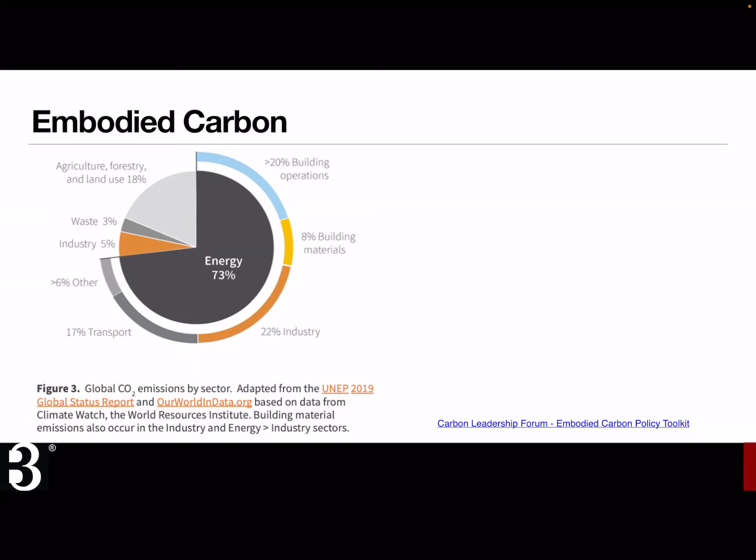So where does embodied carbon come from, and what are the phases that lead up towards understanding the key life cycle stages of a building? They come at the product stage, from the raw materials that are extracted, and then the manufacturing processes that occur. This could be blast furnaces used in making steel, things like that. Then there's transport, and transport actually can happen all through these phases, so that's something to keep in mind.

Then there are the activities involved in constructing whatever it is we're making, and the embodied carbon used there. Then we get into the use phase of a building, which has both operational carbon—the energy used to heat and cool, and for people to charge their phones and do things like that—but we also have maintenance and repair of things within buildings during their use phase, and that's additional embodied carbon.

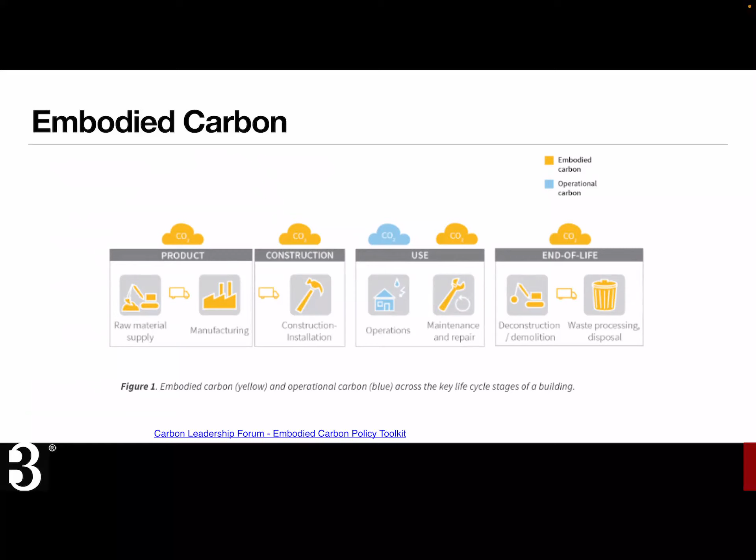And then at the end of life, we have the deconstruction, demolition, and whatever waste and embodied carbon numbers there are from that.

Then we get to certain renovation and maintenance phases, where there'll be other smaller spikes of embodied carbon that come and go, continuing into the future. So it's important to think about how all those pieces fit together, and we have different tools to address these different sources of emissions in our buildings.

So for embodied carbon, two tools that I'll talk about are whole building LCAs, and what's starting to become known as buy clean initiatives, or another way to talk about that are environmental product declarations, which are a review of the embodied carbon in the supply chain of a product. So those are two tools to use to get at embodied carbon reductions.

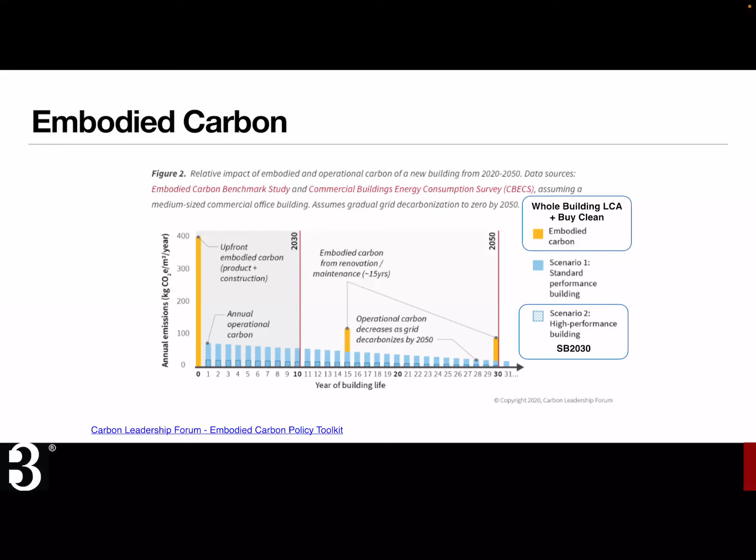But both things are important, and understanding how they fit together is important to consider. The other thing that's important is, in the phases of a design project, you need to use different tools at different phases. During pre-design, when you're conceiving of a project and what systems you're going to use—are you going to have a concrete structure, a steel structure, or a wood structure—that's when a lot of the system level decisions are being made, and there's a high ability to influence life cycle emissions. Then in the later stages, design, construction, and use phases, other tools are more important or more useful.

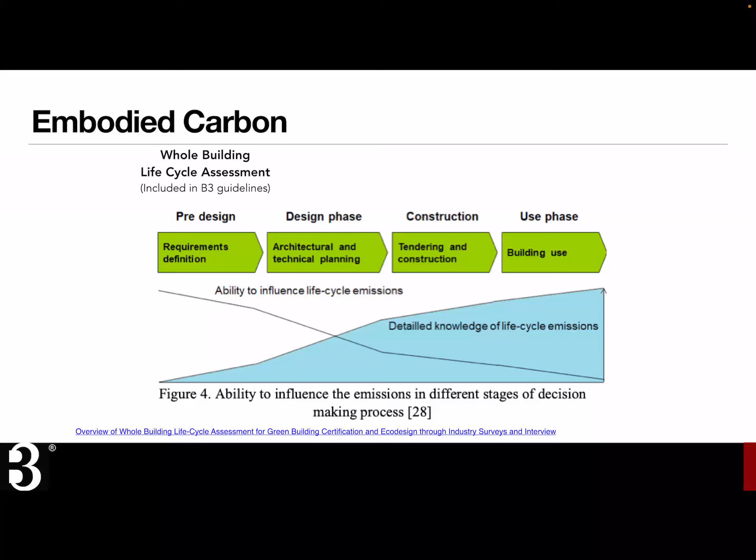So in the pre-design and early design phases, whole building life cycle assessments are a great tool to do some system level comparisons and make those choices. And then once those are made, during construction, that's when a procurement policy—some places known as buy clean, using environmental product declarations—that's when you start to use that tool.

You've decided to do a steel structure, and you want to know the steel that you're using is lower embodied carbon steel than some other steel options you might be considering. And that's how those two tools fit together.

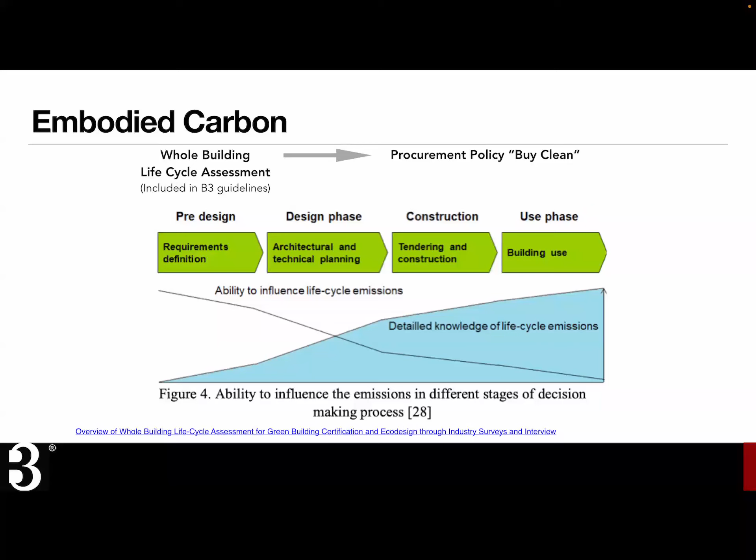We have authored a number of reports now, looking at how we put all these together for construction work here in Minnesota, in terms of how to have a comprehensive strategy for using whole building LCAs and environmental product declarations, something we've done a couple of times.

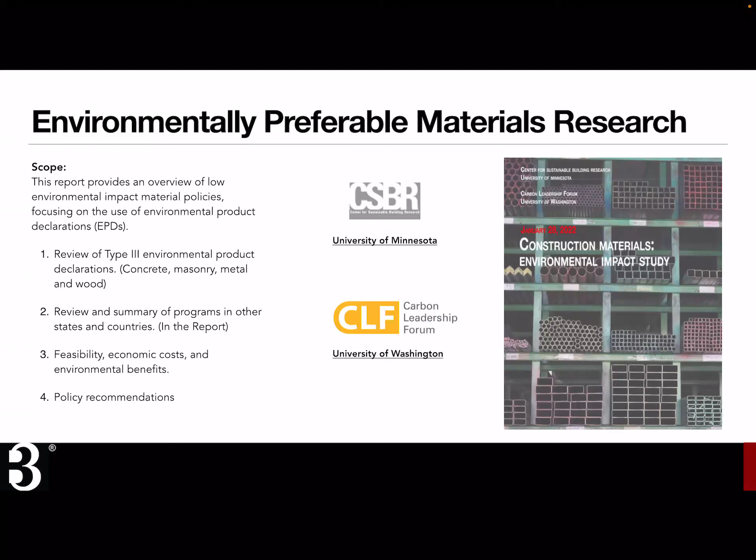It's also important to look at the hierarchy of decisions that you need to go through as you're making these decisions. The first is, should you build a new project, or is there an ability to do a renovation? The most important decision in the hierarchy is whether there's a possibility to do building reuse for a project. Once that decision's made, that's when a whole building design or whole building LCA can be used to optimize some of your decisions, things like structural choices.

Then, from there, you can make some decisions using whole building LCAs. You can even do some sort of assembly level optimization. From there, you then look at material substitutions that you can use environmental product declarations for, and that is how you can make all these decisions fit together.

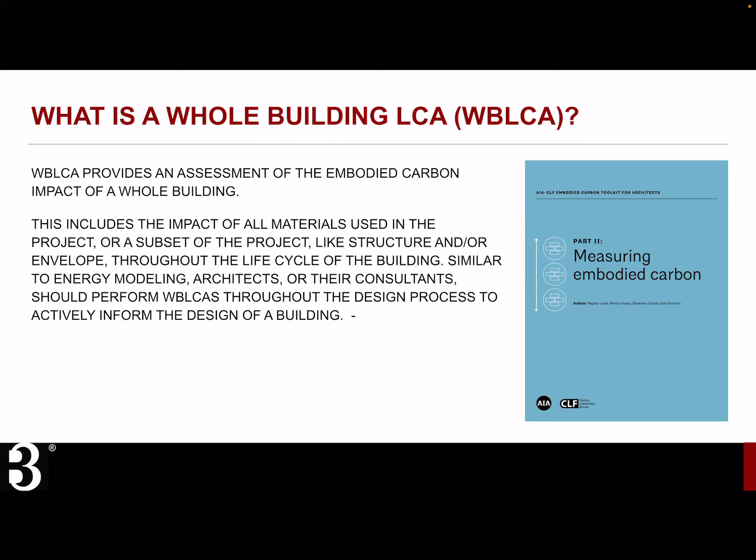The American Institute of Architects has published a series of handbooks and toolkits on how to use whole building LCAs and how you can use them during a design process. So I'd encourage everybody to look at some of those resources.

And within that, they really define which operational or which life cycle stages are considered when you're going through a whole building life cycle assessment. So typically they are kind of cradle to grave assessments to make these reviews and system level decisions.

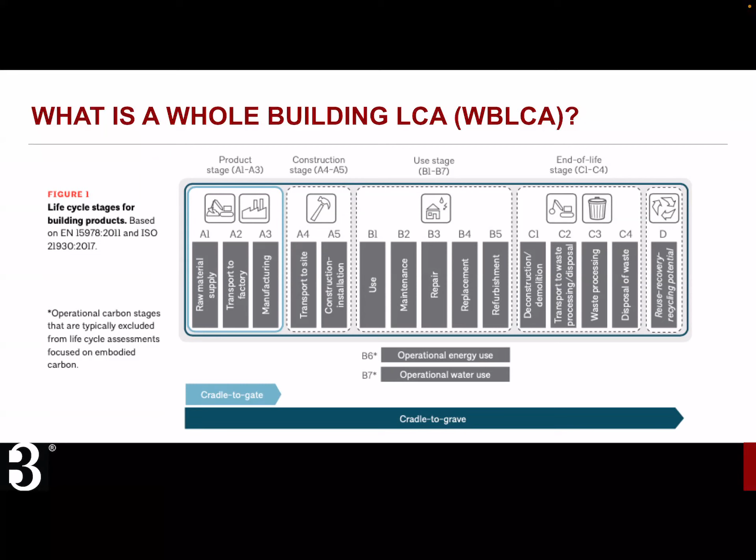That's important, and that's actually something you have to control for when you're doing some of this modeling, to make sure whether it's a whole building LCA or an environmental product declaration, you have the same life cycle stages assumed as you're doing a comparison of one system versus another in a whole building LCA, or one product versus another in an environmental product declaration.

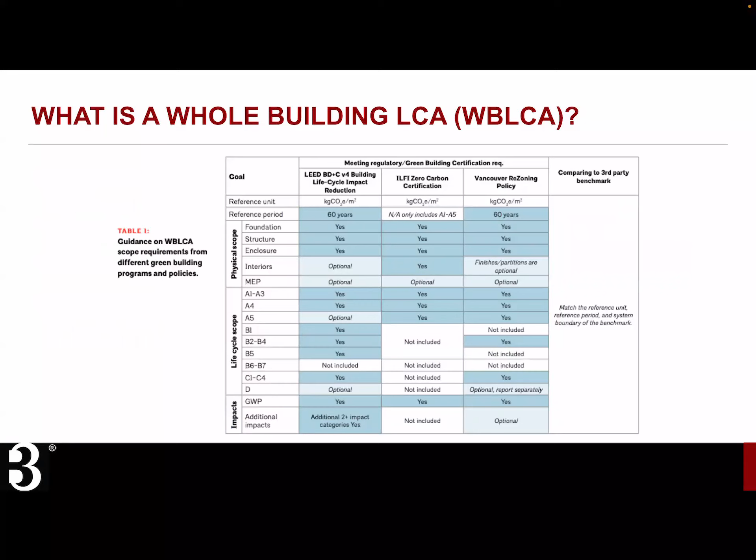There's a series of, and I won't go through all this detail, but this slide shows a number of the physical and life cycle scope controls that are put in across different systems when you're doing whole building LCAs. So that's important to keep in mind. That's still sort of a work in progress.

Some of the big recommendations that came out of the AIA toolkits are to use whole building LCAs to look at the possible savings from building reuse, to identify hotspots of projects for particular materials early in the design process, to estimate the whole building carbon footprint of a project, and to compare different scenarios. One design scenario versus another might have a different carbon footprint, both at the building design level, but also down to the system level. Those are all things to use whole building LCAs for.

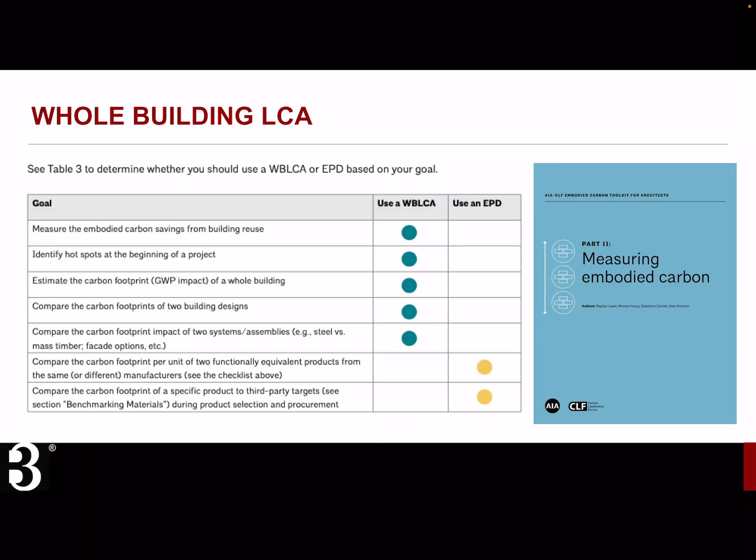Environmental product declarations are better used to look at comparing the carbon footprint per unit of two functionally equivalent products. In other words, compare one steel section that you're using in your structure versus another steel section. That's how you can use environmental product declarations. You have to have functionally equivalent units with equivalent product category rules. So it's great for steel section versus steel section, not as good to compare steel versus concrete or something like that. The whole building LCA tools are better for those sorts of things.

I'll skip through some of these things. There's also a number of discussions or reviews looking at benchmarking the values that we get out of some of these tools. Here's some examples from the Carbon Leadership Forum and some other initiatives that are important to consider as you're looking at what's the level of data that you get from some of these systems.

One challenge with LCAs is that they're very good for relative comparisons of one material versus another, and that's what they're good at.

They're not like a nutrition label, so you can't get absolute accuracy of data in these systems, where you can feel like you have a nutrition label with embodied carbon data. So good for relative comparisons, not so good for absolute data, and that's just a reflection of the LCA data sets. Maybe there'll be some questions about that we can discuss at the end.

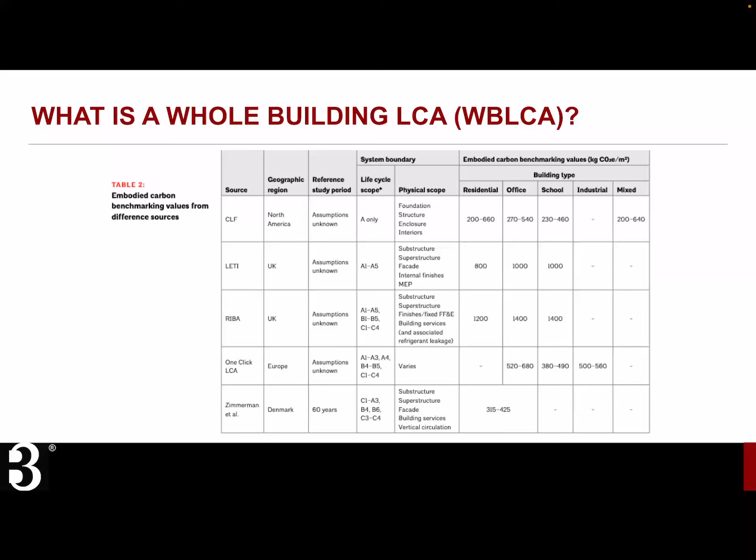So just click through some of these things.

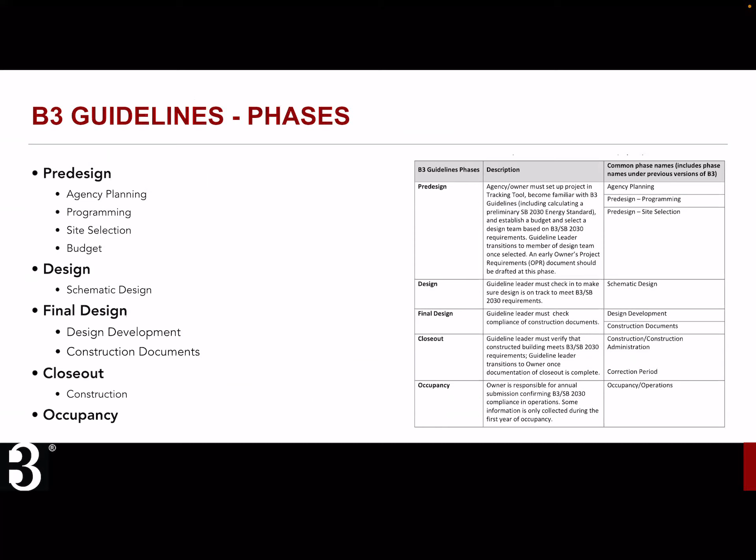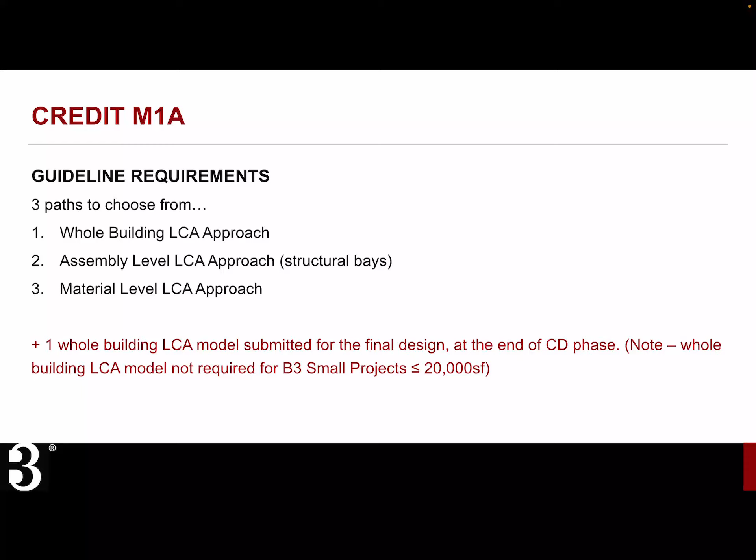Here are some examples of how we've integrated embodied carbon within the design phases of our Minnesota Sustainable Building Guidelines. We asked teams during final design to put together a whole building LCA. We're also working on how we'll use EPDs during the construction phase. Right now, we have 3 paths teams can take: whole building LCA, assembly level, or material level LCA approach.

We basically collected data for a long time. Now what we're having them do is show that they can make a baseline building with their whole building LCA and target a 10 or 20% reduction in embodied carbon emissions, as our current set of guidelines, done at the whole building, assembly, or product level.

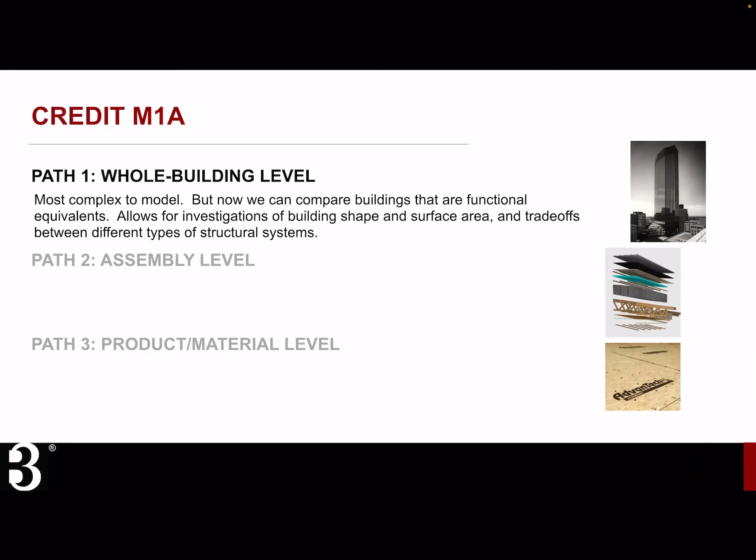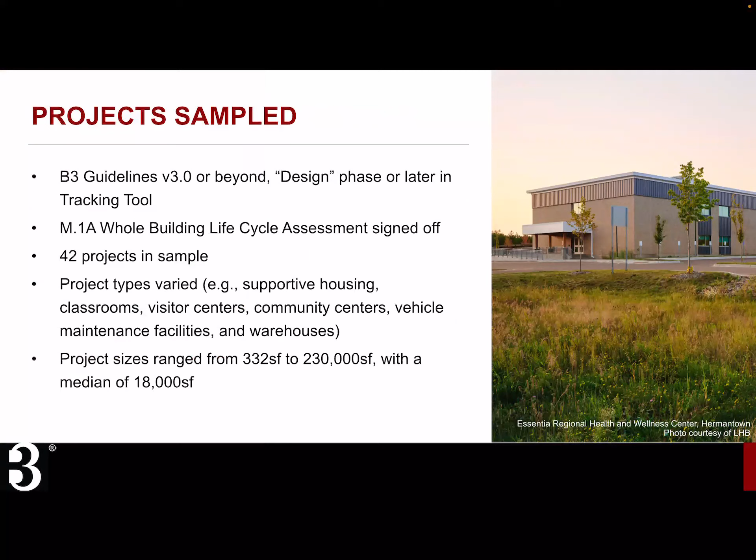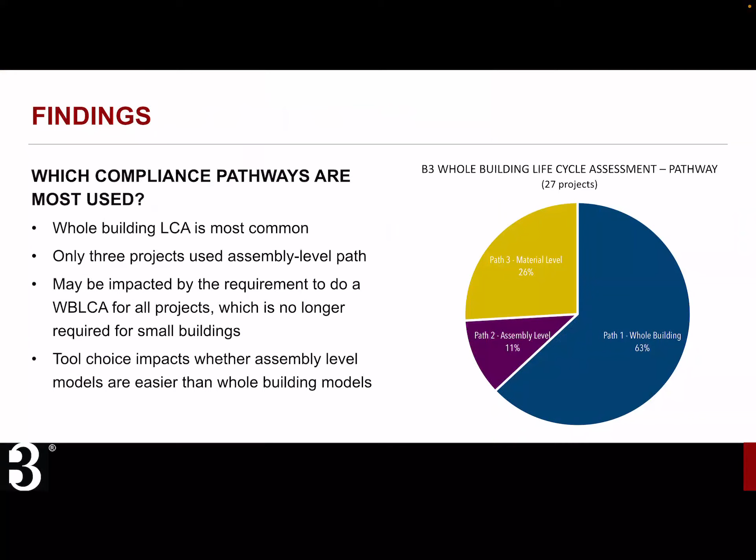We're working on some of the next phases of these guidelines. We've tracked for almost 20 years now whole building LCAs on a number of projects. This was a review looking at a sampling of those projects where we had 42 projects with whole building LCAs, with a range of project sizes. Most of our projects are doing whole building LCAs, some are doing material level, and fewer still are doing assembly level whole building LCAs.

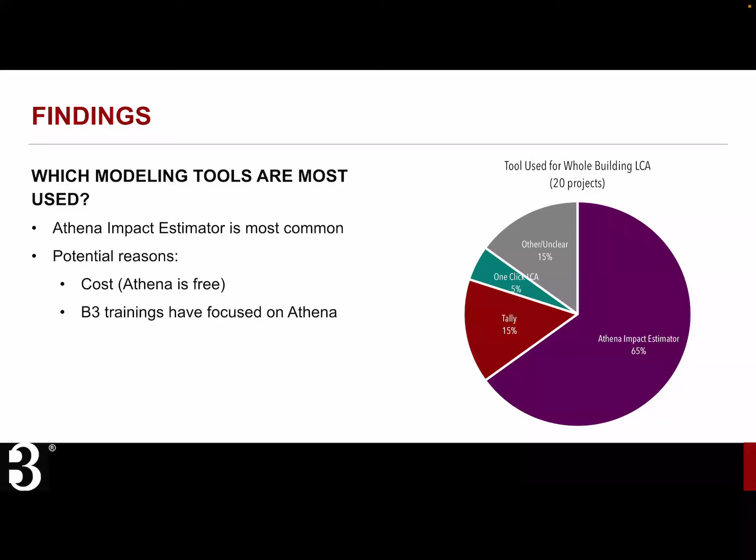The tools projects are using - most of our projects have a long history of using the Athena Impact Estimator as our whole building LCA tool. It's also free, so that's the tool most teams are still using. However, we've opened it up so teams can also use Tally, which is integrated with Revit, and we're starting to see more teams use that. One-click LCA is another tool some teams are starting to use.

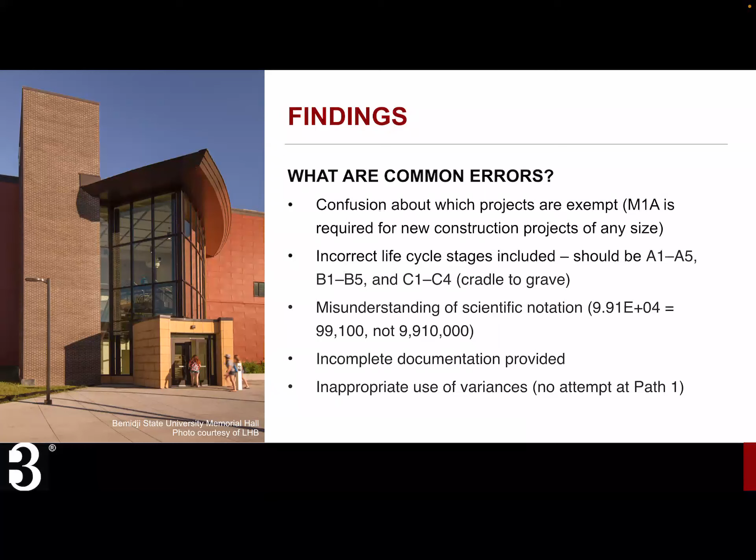Common errors or challenges: projects are confused whether they're exempt from doing some embodied carbon reduction targets, mostly within some of our renovation projects or new plus addition projects. There's a lot of challenges with people including or not including different life cycle stages, basic math errors some teams make, and some incomplete documentation.

We're finding a range of results. What we'd love to do, and the research is still out whether we'll achieve this, is find a typical carbon emissions per square foot of certain project types that would allow us to set embodied carbon budgets. We have a median right now of around 20, but there's quite a range in the 16 projects we looked at, and some outlier projects that might just be math errors.

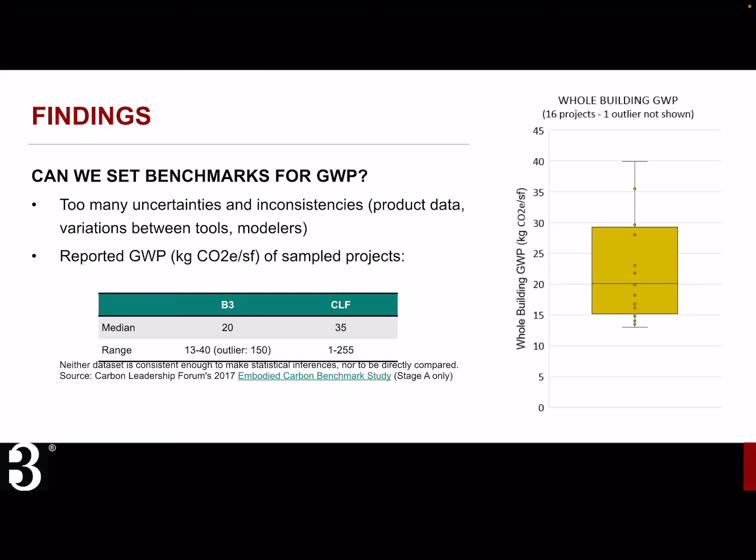The Carbon Leadership Forum is also starting to look at whether they can set the same kind of embodied carbon per square foot numbers, and they're having some of the same struggles.

We'd also love to connect embodied carbon emissions to operational carbon. We've started to do some work in this space. That's also a challenge because in some ways we're comparing one set of carbon data - the embodied carbon - and because of the error in some of the data sets and data sources, it's really hard to compare with the operational carbon, where we have much better quality data around those carbon emissions. So we'd love to connect them.

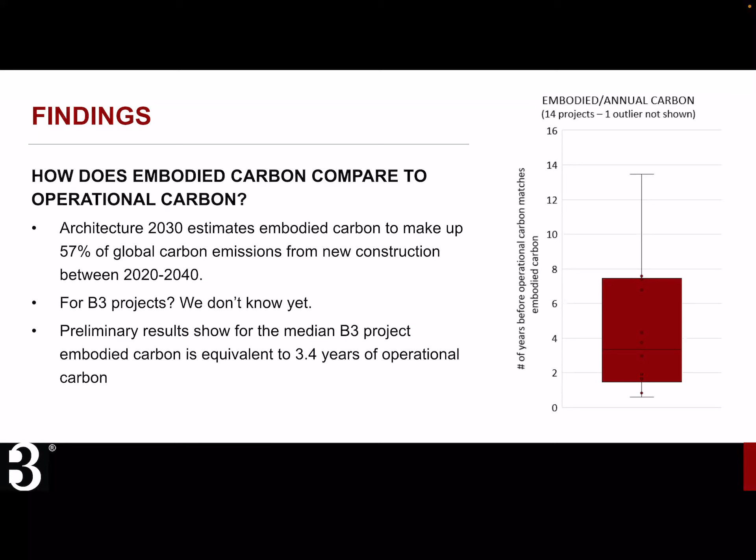We've started to look at how quickly, if you spend this much embodied carbon, how many years of operational carbon is that in the operation of a building. We have some initial numbers, but we're still working on that.

Opportunities in the future include doing some more control measures around modeling so we can get the things we have in the operational carbon space - we just need to do a better job of that in the embodied carbon space, to control for stages, control for modeling error, and those kinds of things, so we can harmonize that work. And all the while, until we get better data sets of embodied carbon, we're still going to struggle with some of these challenges.

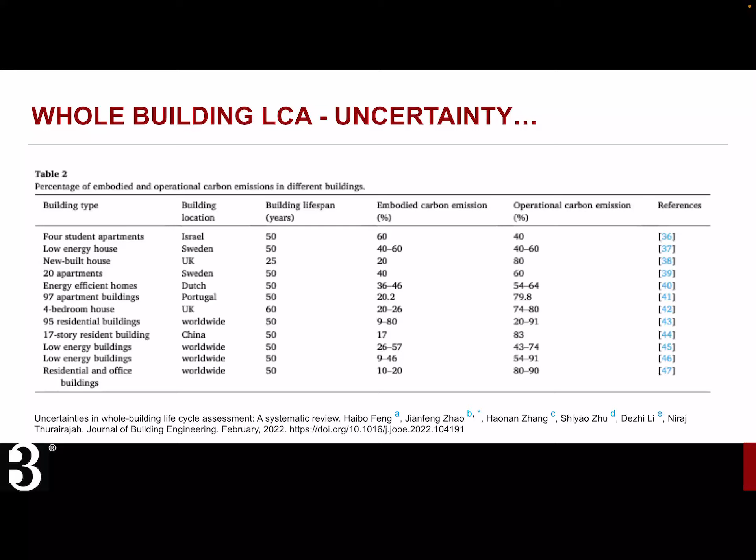This was a study looking at embodied carbon emissions as a percentage of the building lifespan operational carbon emissions. If you look at this chart across different project types, they range from the low end of 9% to the high end of 80%. So I'd characterize that as all over the place in trying to tie these two data sets together. Some more work to be done.

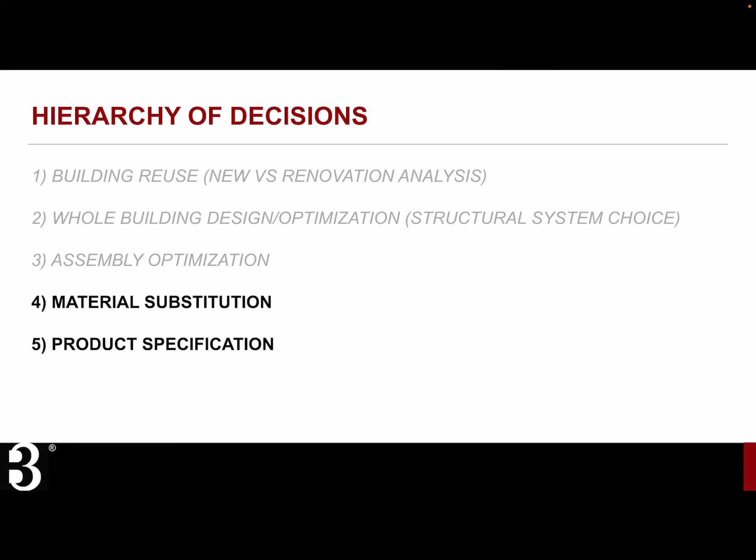So that's the beginning part, talking about whole building LCAs, a tool that addresses the first three phases of the hierarchy of decisions around embodied carbon in a project. Then we get to the last two phases, where we've picked our building, decided new versus renovation, started to pick some assemblies. Now we're in the optimization phase of picking one material versus another, one product versus another. What's the tool to use to do that?

The tool that has been developed is environmental product declarations. These are created from the International Standards Organization, which creates a standard and quality control around how these declarations are made by product manufacturers. Important in their creation, it's a third-party verified standard. The product category rules are really important in environmental product declarations—they create control measures so you can compare products within the same product category rules.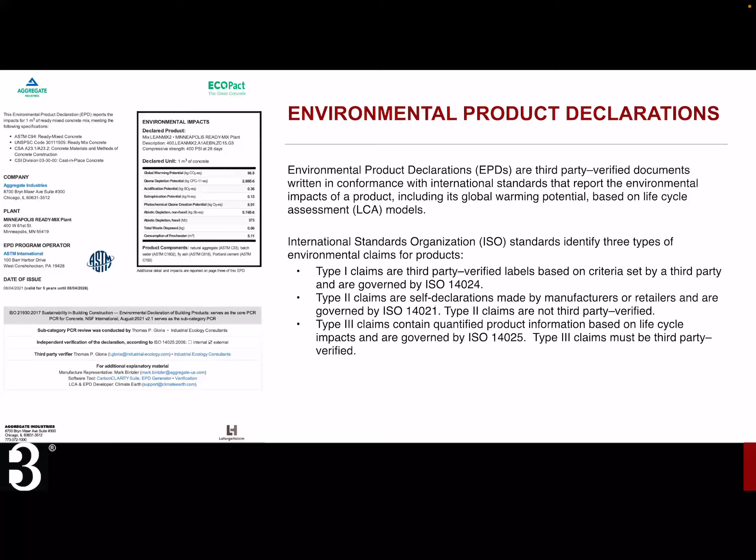So you will see this within environmental product declarations. In some industries, you can't get product-specific EPDs—for the most part, we only have industry-wide environmental product declarations. Within concrete, you can get a lot of product-specific ones, but wood products and masonry products still mostly have industry-wide environmental product declarations. That's just something to keep in mind.

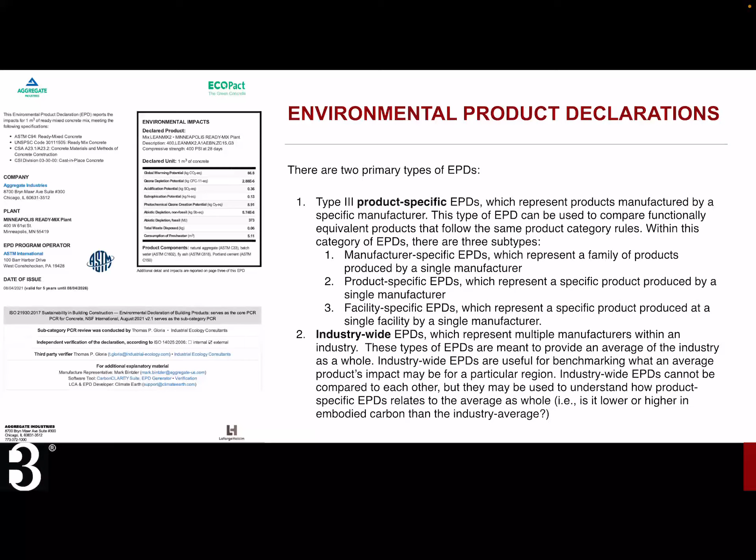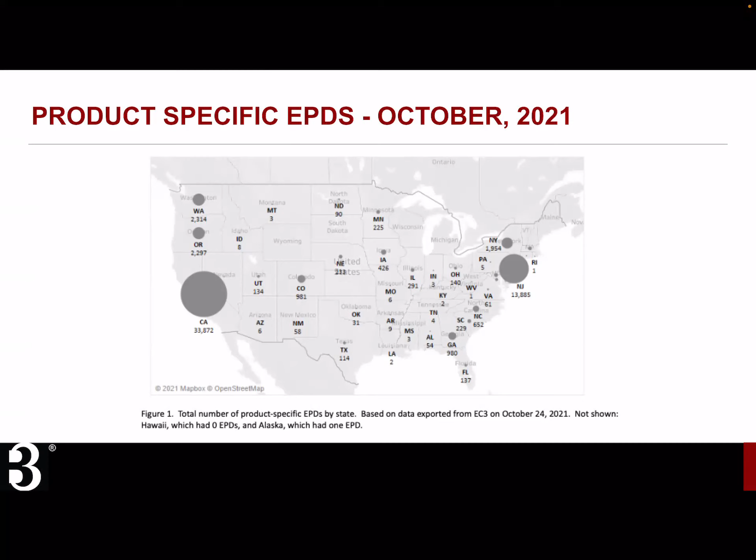We don't have as many here in the Midwest—it's a very limited amount compared to the East and West Coast.

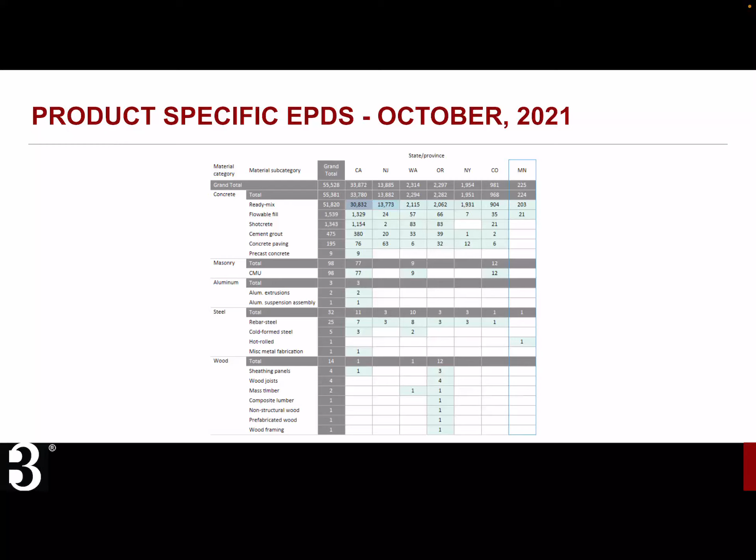If we look at the amount of EPDs by product category, most of them are in concrete, because concrete's seen as one of the hotspots of embodied carbon in construction projects. A lot of legislation has targeted concrete specifically to require EPDs and look at embodied carbon reductions for that product. That holds true in the more detailed numbers too—lots of EPDs around concrete, not as many for masonry, steel, and wood products.

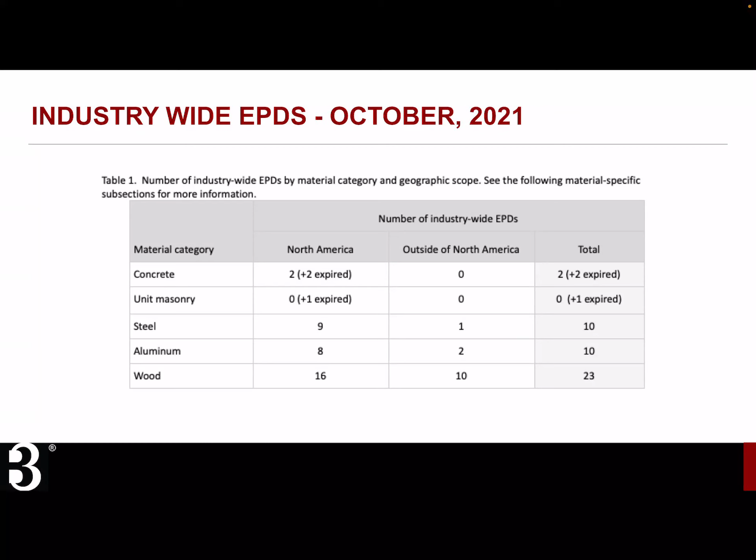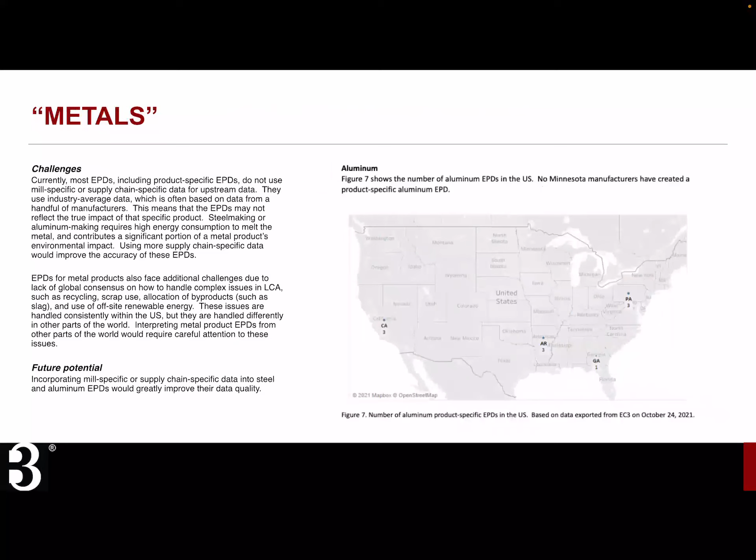Here's what I was talking about before, where a number of industries have created industry-wide EPDs for steel, aluminum, and wood. There's actually a unit masonry industry-wide EPD now, I believe. I'll skip through some of this, but it goes through those individual materials and where some of those EPDs are around the country now.

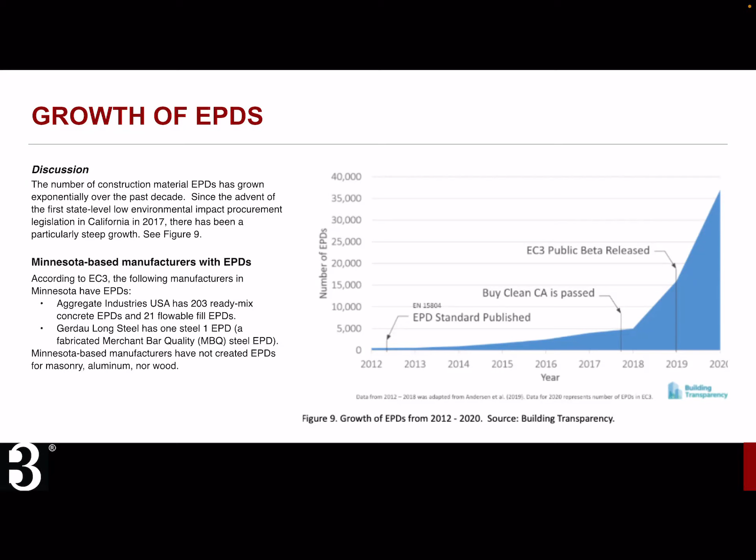Because of that legislation, other states—Washington State, Colorado, Minnesota, and a bunch of others—are considering requirements around EPDs. So you're starting to see an exponential increase in the number of EPDs being created. I've been meeting with manufacturers here in Minnesota, and we're probably slated to triple or quadruple our number of EPDs in the next couple of years. I'm sure other states are seeing a similar growth pattern. In addition, at the federal level, GSA is also considering doing some things around EPDs, which would continue that expansion.

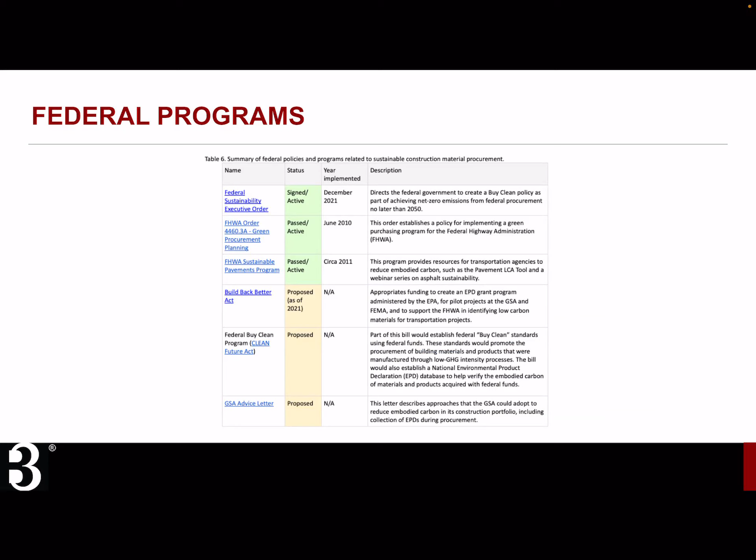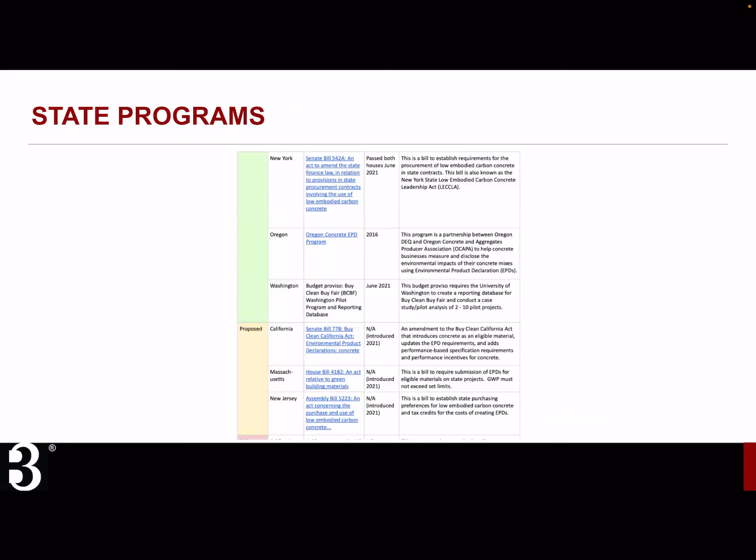Here's some slides showing a number of federal policies looking at EPDs, and then state policies in California, Colorado, New Jersey, New York, Oregon, Washington, plus proposed programs—expansion of the California program, Massachusetts, and some other states. We also have a bill in Minnesota to do a buy clean policy for construction that's not already included as part of our Minnesota Sustainable Building Guidelines.

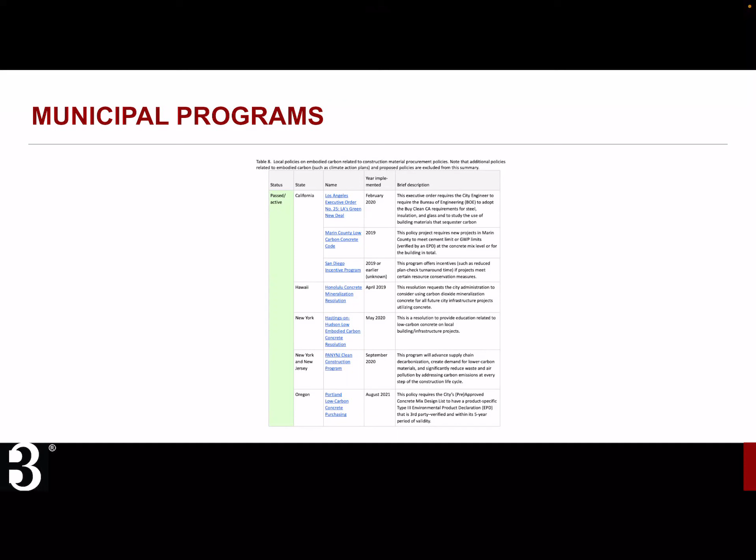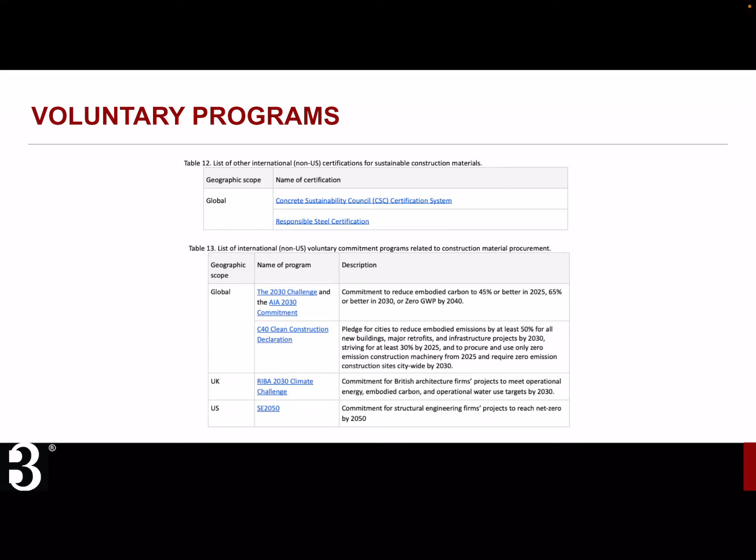And you're also starting to see a number of voluntary programs, both globally from responsible steel certifications and concrete sustainability council work. The 2030 challenge, Architecture 2030 challenge, is looking at setting embodied carbon targets. The C40 clean construction, the structural engineer firms are doing a 2050 challenge around net zero carbon. So a lot of programs coming up more and more that are targeting embodied carbon and setting some targets for those in different industries.

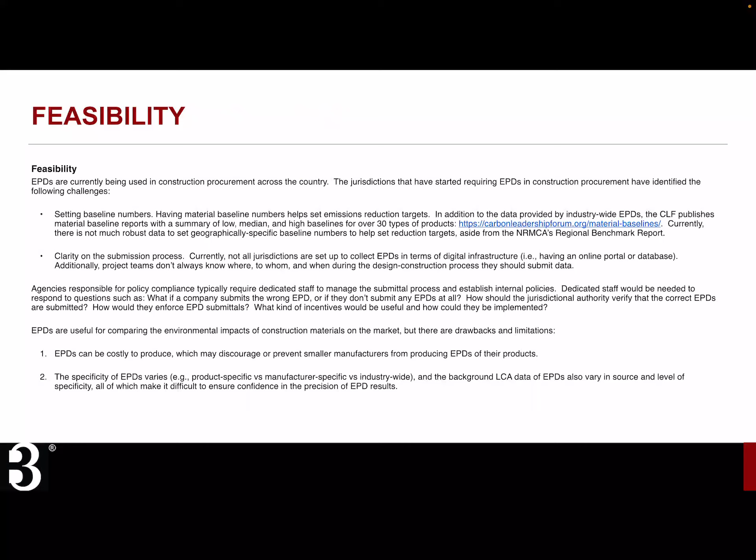In terms of putting together programs, it's more and more feasible to do this. States or municipalities have to consider, as you're putting a program together, how are you going to track the data? Are you going to use a national database to track EPDs? How will, and who will, review them? Can you give manufacturers notice that this will be required in the future, to give them some time to scale up creating EPDs?

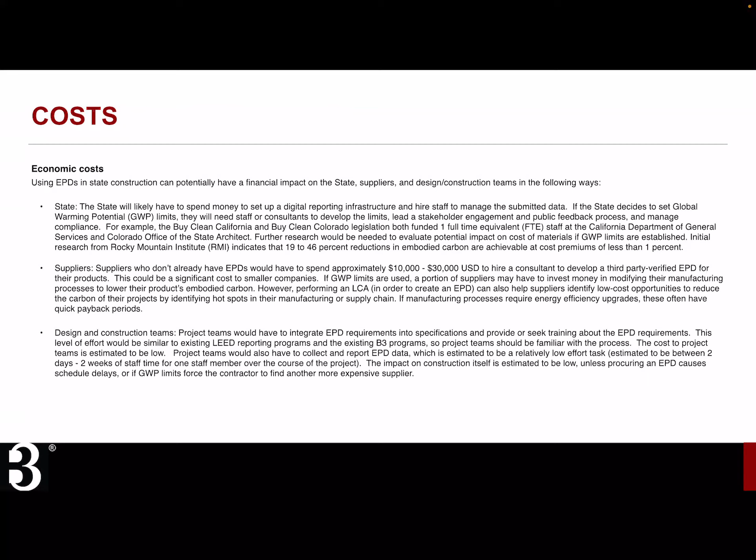There are also some challenges around small manufacturers. Small manufacturers might not be able to afford to put EPDs together. So sometimes states and jurisdictions have thought about doing incentive programs for small manufacturers to help them create EPDs. And then there's design team education so that they know how to collect these things, know how to review them and submit them—that's needed.

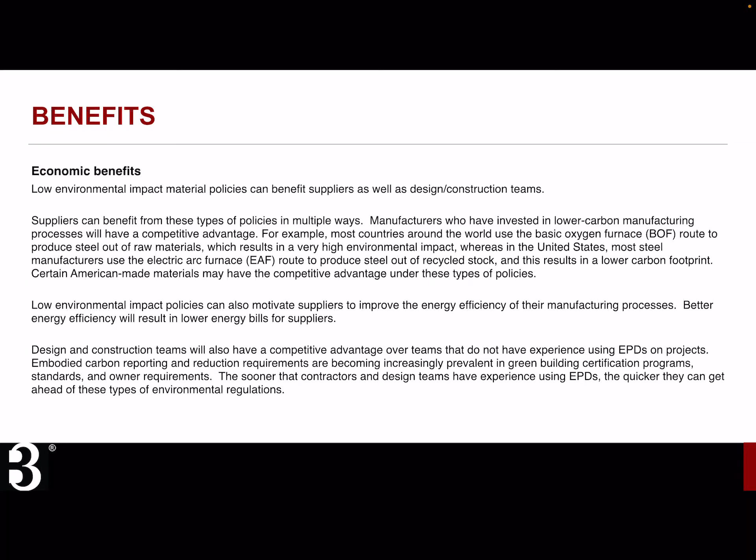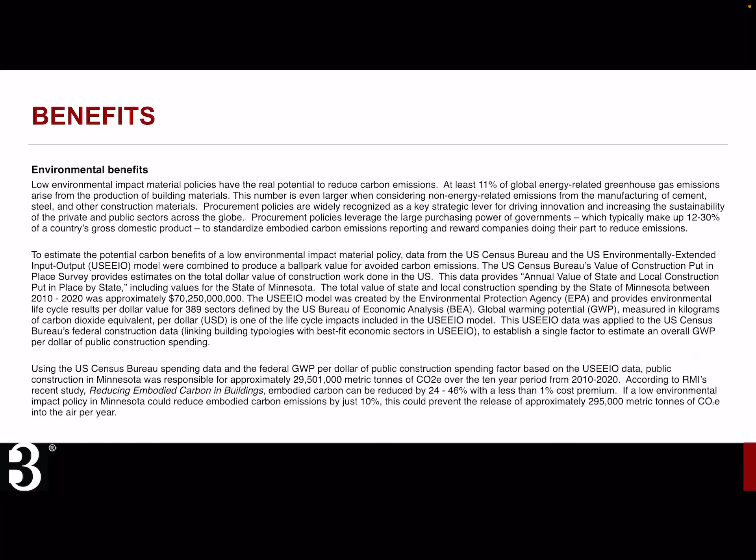But there's a lot of benefits. There are economic benefits to the manufacturers, because generally any reduction of embodied carbon is also coming with some energy efficiency in the manufacturing process that could save manufacturers some money. There's also a lot of discussion with manufacturers that if they create EPDs before others, that could give them some competitive advantage. And then there's the obvious environmental benefits to doing embodied carbon reductions within the supply chains.

So I'll skip through some of these things. Well, I do want to talk about this a little bit. One challenge is, when you talk to designers and other groups, environmental groups, there's a desire to try to collect everything on a project to address embodied carbon.

And, based upon our experience in doing some of these models, I was going to say it's a fool's errand, but it kind of is, where you're trying to get data on everything. There's a lot of time required to do that. There's a big data set to do that, when really you need to focus on where are the hotspots. It's kind of back to the 80-20 principle again—probably 80 to 90% of the carbon emissions are in a much smaller set of the materials used in a construction project. And it's much better to put the focus there, work on those products well, rather than to try to collect every little thing.

So most EPD requirements have definitely focused on concrete and steel, and that makes a lot of sense. However, they've started to expand into other materials, and I think that's something we have to think about. What are those other materials? Are they really hot spots, and is it worth our time to get into them? So concrete, steel—definitely important.

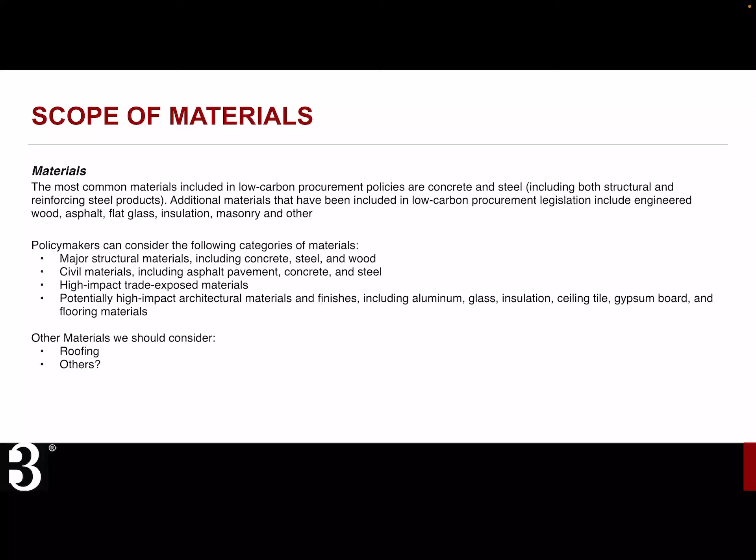Wood and some of its benefits for embodied carbon are important to consider. However, should we be looking at wood with EPDs, or is that more about the benefits of switching to a wood structure? You're going to track that with your whole building LCA, and maybe it's not as important at the product level. Asphalt might be a material, especially for road and bridge construction, to consider. And then other high impact materials to look at. So we're still doing some work there.

And after this, I'll start to wrap up to leave about 15 minutes for questions. Once you've started to collect environmental product declarations, the next level of discussion is: if we collect a large enough data set of materials across our supply chain, geographically across the country, that relates to the projects we're building in a specific location—if we collect enough of that, can we then set a limit, if we know our baseline embodied carbon for a particular product? Maybe we can set a limit for that particular product.

So some of the voluntary programs are starting to set reduction targets for whole projects. And some of these are quite aggressive targets—45, 65%, net zero. I don't even know how you do net zero embodied carbon. Somehow you are going to have to do more—operational measures, manufacturing 100% renewably supplied, or something like that. So that's something you're starting to see. We're going to have to think through how all the sectors fit together to meet our climate change goals, to really have a better understanding of whether some of these reduction targets make sense.

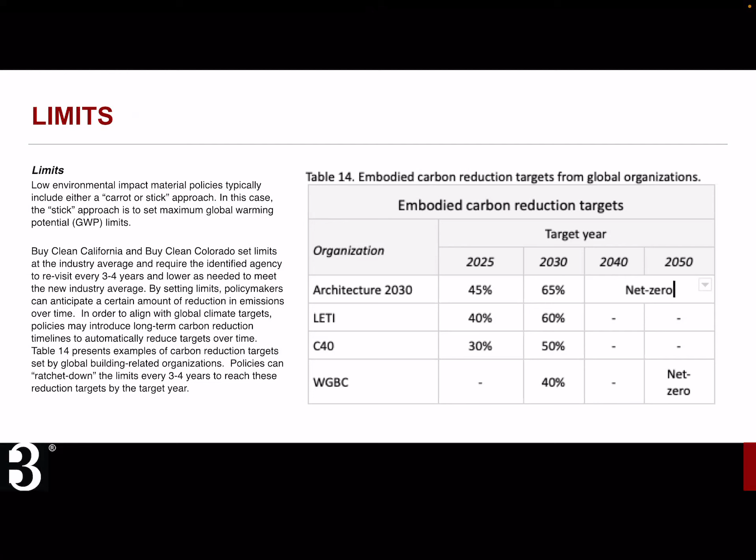Across places that have set policies for embodied carbon across different materials, you're seeing other materials come into different policies. But different places are using different methodologies to set embodied carbon limits, using different data sets and setting limits in different ways. Here are some examples of those.

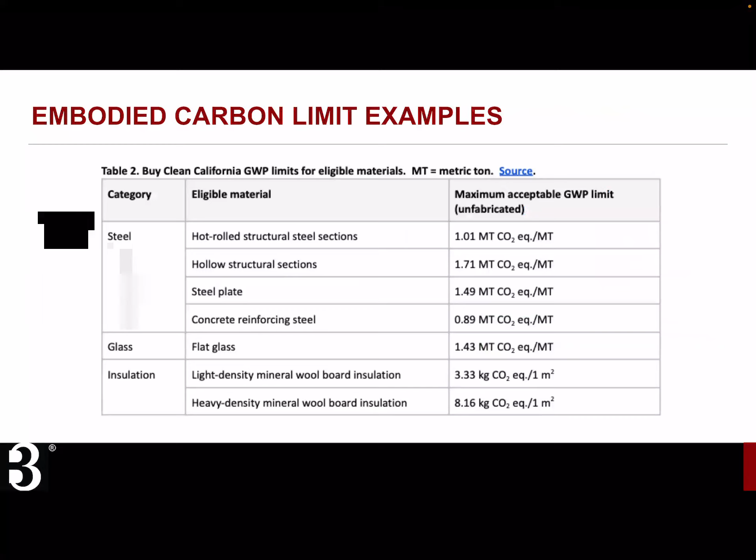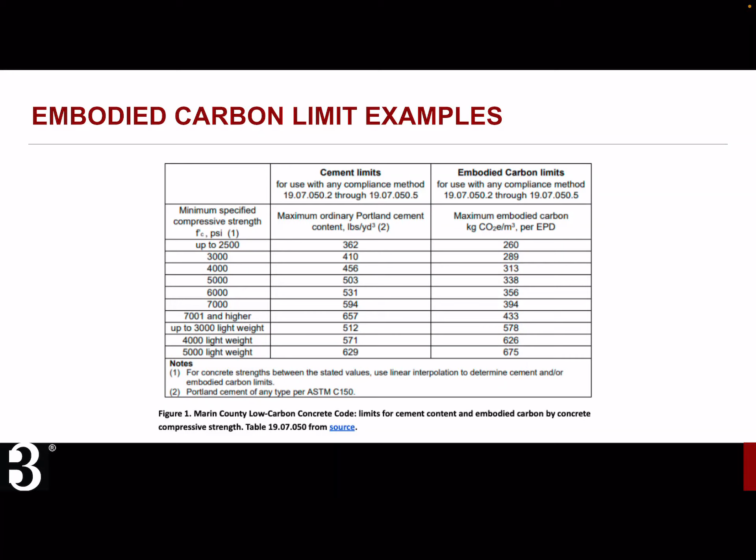Using the Carbon Leadership Forum's EC3 tool, one tool some folks are using, with requirements for maximum carbon emissions for metric tons of steel, glass, and insulation values. This example is from Marin County's requirements, showing some examples of concrete limits. With concrete limits, you really have to look at the design strength and have a specific limit for that, because that can affect things.

So with that, I think we've got about 15 minutes for questions, and Perry, I'll defer to you to let me know what questions to go through.

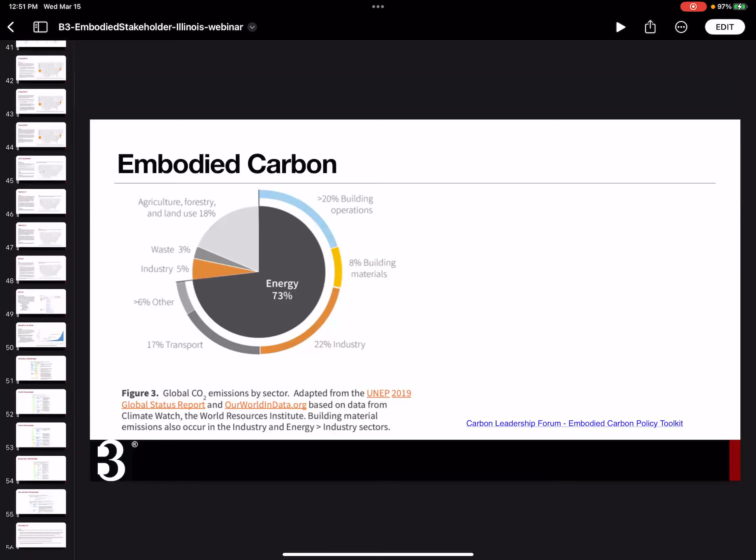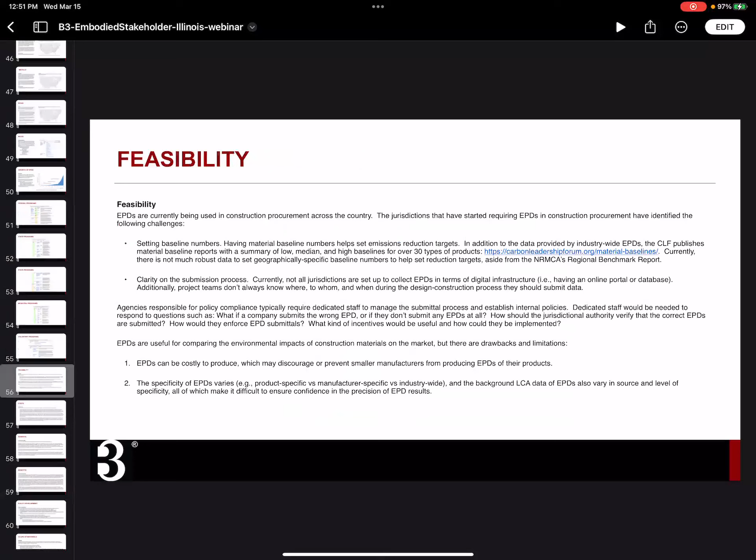I can't find it right now, but if the person can give a specific slide number, I can look at it. It's basically trying to reference the high impact trade exposed materials. Here we go - major trade exposed. That's a good question. I think there's a word maybe missing there, but I don't know what that's referring to. Sorry about that. Okay, fair enough, moving on.

Are there any methods or tools being developed, or in practice, that assess the embodied carbon of existing building stock? For example, completed construction projects.

Yes, a lot of the same whole building LCA tools that I mentioned, and Architecture 2030, look at existing stock. If you reuse those buildings, does that create an avoided embodied carbon number that you should consider? I've seen companies looking at that within their portfolio of buildings.